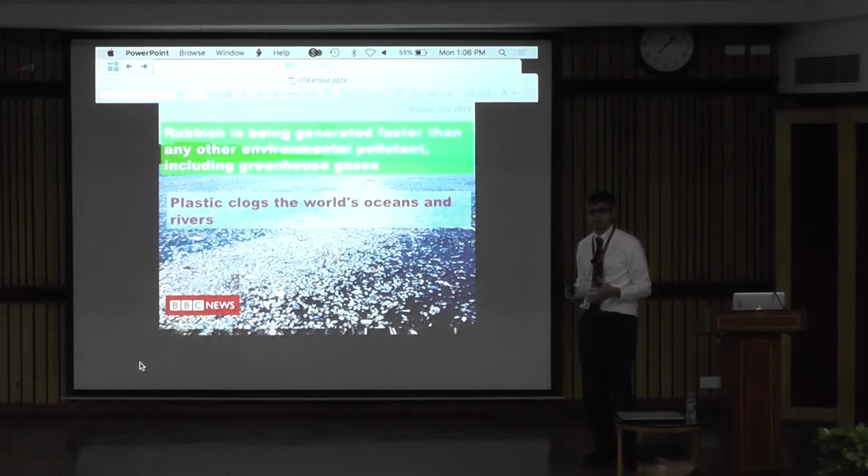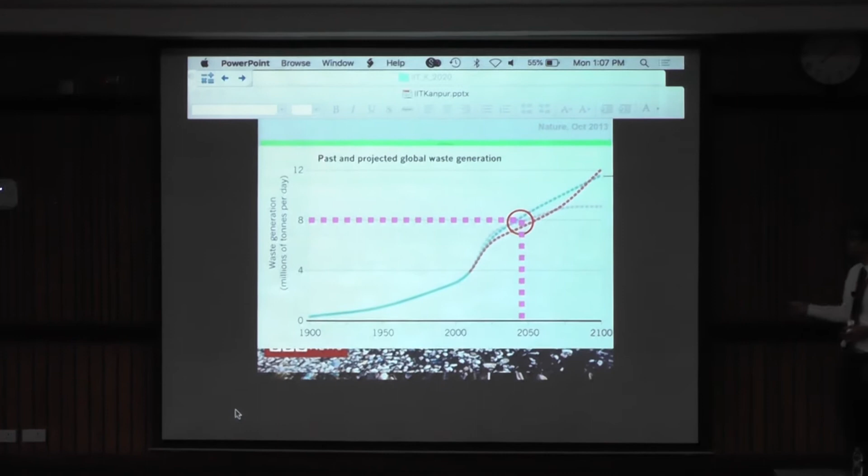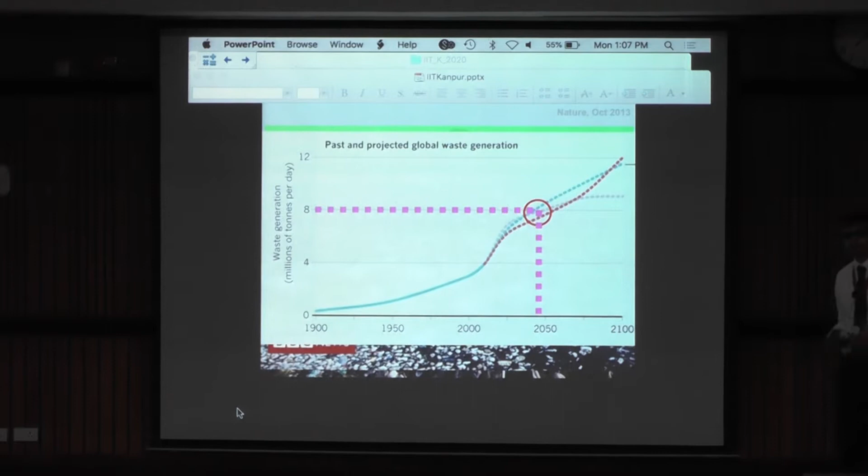You have plastic that's clogging the world's oceans and rivers. To give a sense of perspective, this shows on the y-axis the waste generated in millions of tons per day, and the x-axis is the years. It's projected that based on economic prosperity and population growth, by the year 2050 we will be generating about 8 million tons of waste per day.

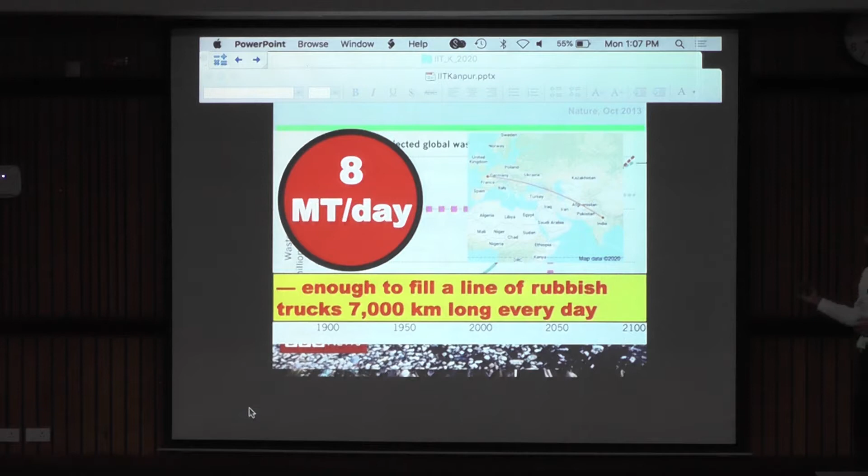That's essentially enough to fill a line of rubbish trucks about 7,000 kilometers long, which is half the diameter of Earth. Or from India, if you go all the way up from Kanpur, you can go all the way up to France and line up those trucks. And this is the waste generated per day, okay, so a very massive amount.

So why do we have this waste? What is the problem here? The problem is essentially the cost. In terms of solid waste management, it's one of the biggest costs, the second biggest cost in any municipality. The cost of handling solid waste is extremely high.

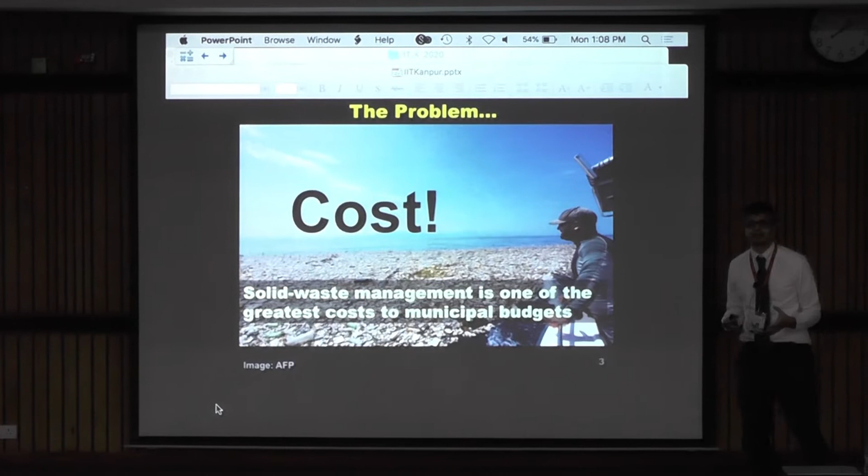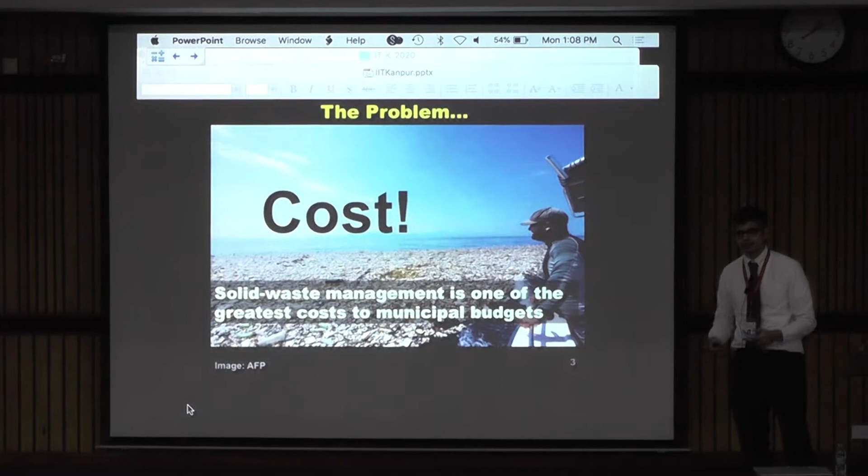So what happens is in most places where they cannot handle this waste, it then starts floating out into the oceans, into the rivers, into landfills, overflowing. And the current strategy, essentially, in managing most of this waste is you typically just burn it.

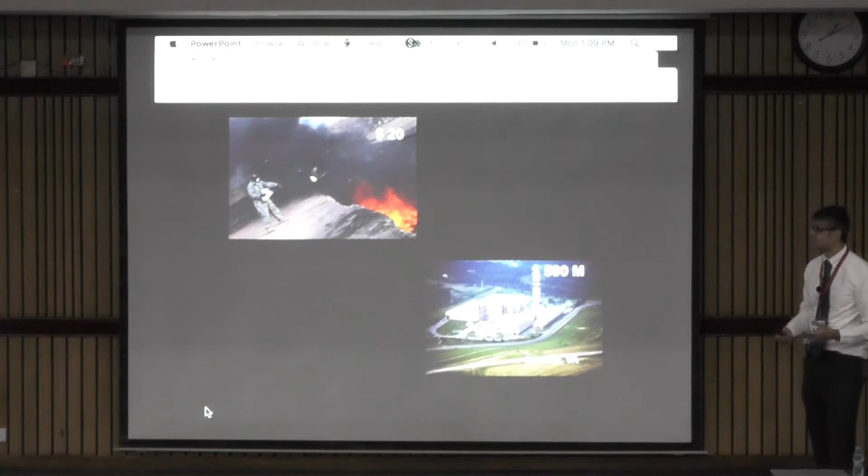You have other options: these smaller burn barrels that you can buy online, used to burn waste. This is a photograph from a village in Alaska called Ogashik, and what they do is every 2 days someone goes and burns the waste collected by the village in this burn barrel.

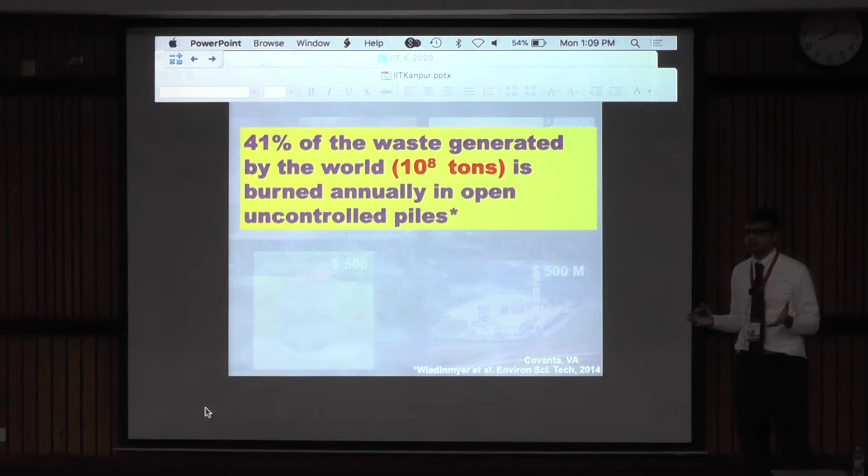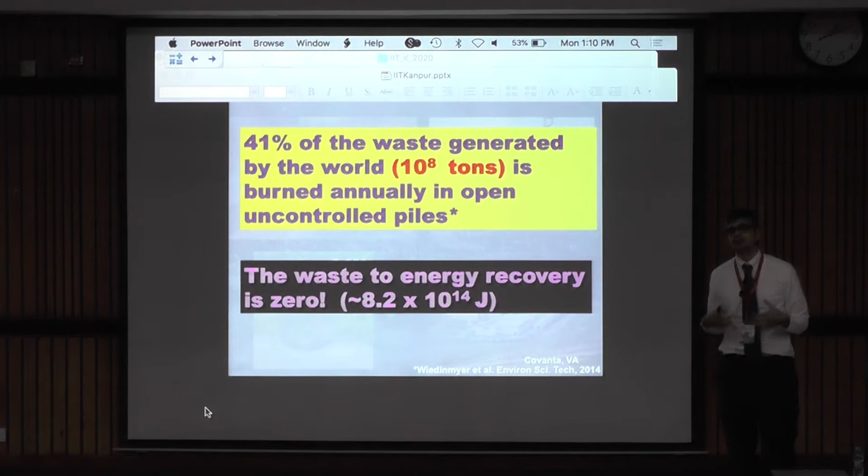There is a tendency as of now that around 41% of the waste generated is just burned, burned in the open in uncontrolled piles. There is no waste to energy recovery, and that's a significant amount of energy just going into the atmosphere. Why do they burn it? Because that is the only way of reducing the volume of waste.

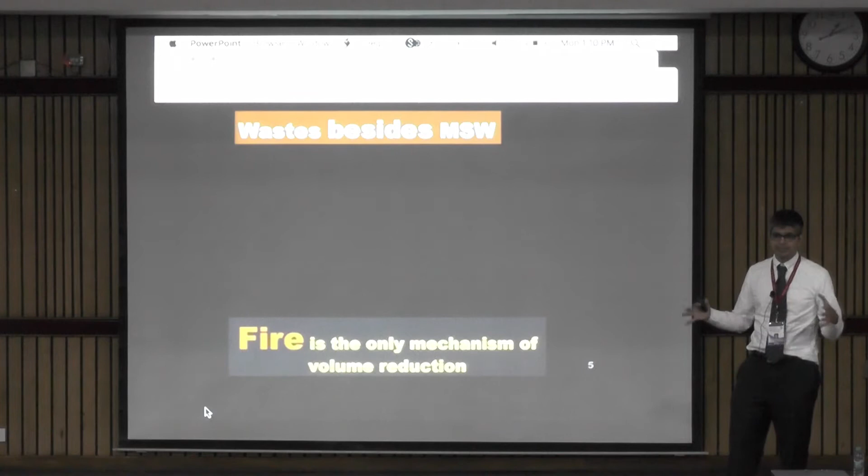Beside municipal solid waste, or MSW, you also use fire as a mechanism to clean up other kinds of waste. You have forest litter - that's a photograph of firefighters basically clearing up forest waste.

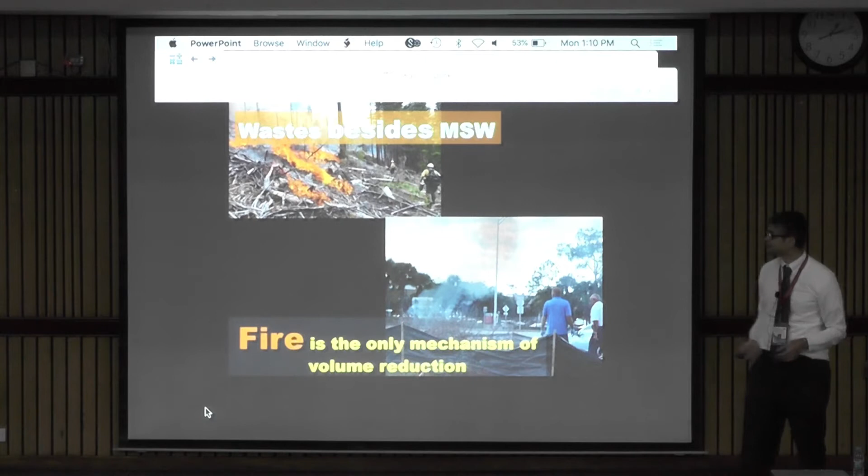This is a photograph I took in Florida, where on the highway there was waste accumulated after a storm, and they were basically clearing it up by just burning it. That's a photograph in Ghana, and that's medical waste right here that's being burned, again, for volume reduction.

This is an oil spill in Deepwater Horizon in 2010. The oil is being burned by these two boats, again cleaned up by fire, open burning.

dealing with China. This is a person basically, again, trying to burn waste in the open, a photo taken in China, talking about how China is dealing with a very big problem with waste, and the way they are curbing it is, again, just by burning it.

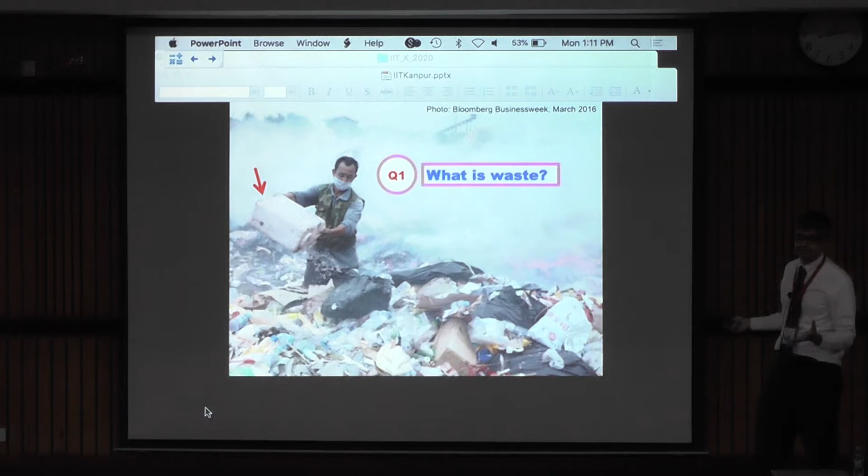So I'll start this talk with 3 questions as a precursor. We'll first figure out what is waste, why does it burn slowly, and the third is, why do we care? In my talk, I will not focus so much on emissions, but just with this basic idea that you have this waste, you are trying to burn it, but that burning is fundamentally very slow - and that is the first problem that we have to solve as engineers.

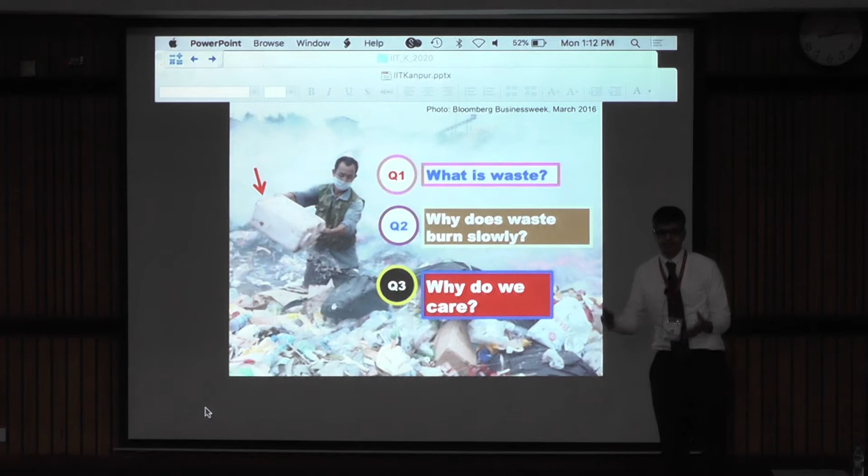And then you have other problems associated with emissions and repackaging that waste product and so forth. So what is waste? Waste is basically comprised of paper, yard waste, plastic, food waste, wood, a lot of things.

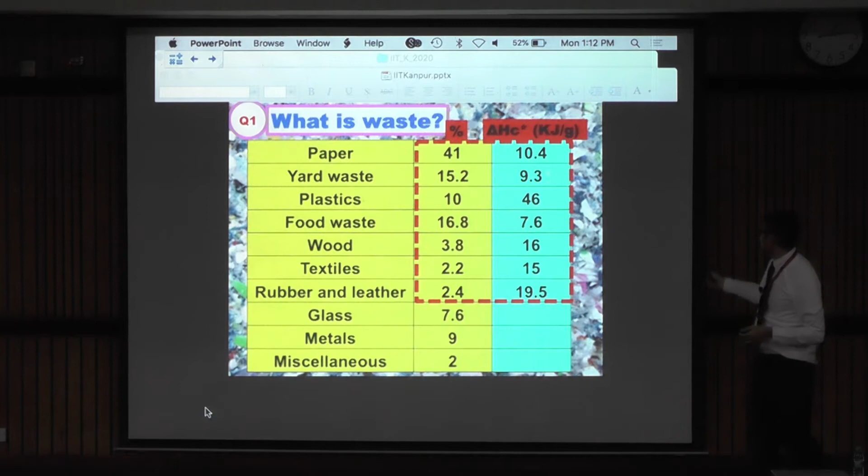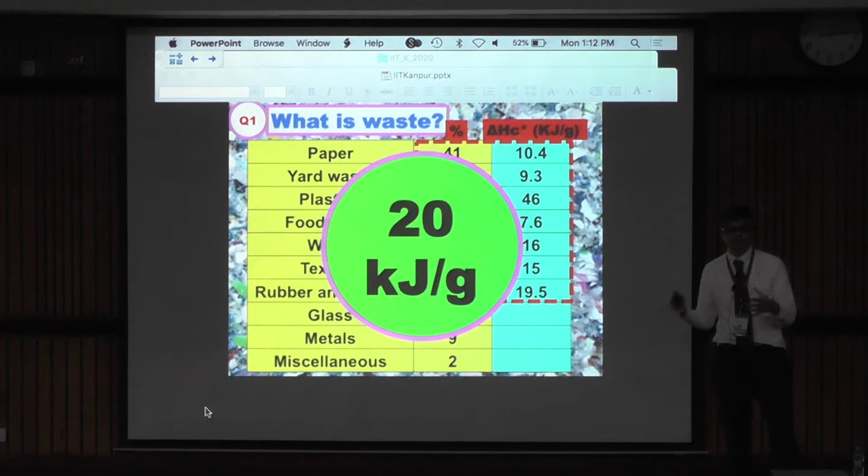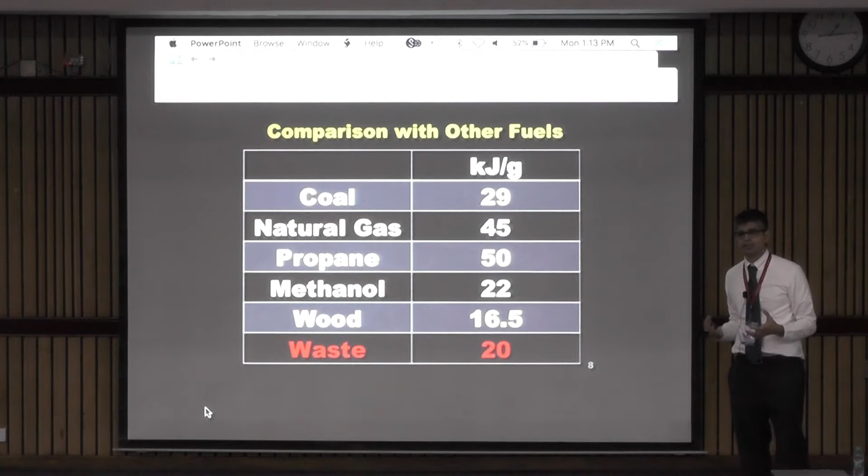What I have here is the heat of combustion of different kinds of waste. If you do a mass average, you come up with a number of about 20 kilojoules per gram. Typically, a waste stream fluctuates between 15 to 30 kilojoules per gram of energy. Compared with other fuels, you're not doing very bad. Coal is about 29, natural gas 45, propane 50. Waste is down here, about 20 kilojoules per gram. So it is a fairly good source as a fuel.

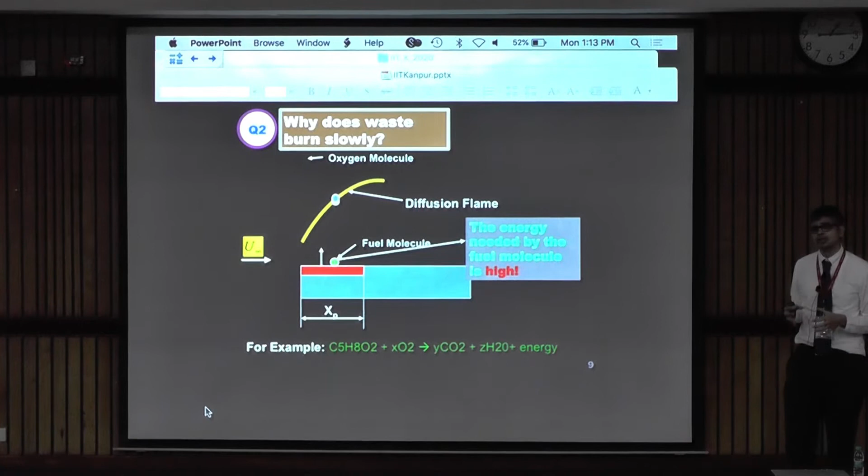But when you try to burn waste, especially in the open as a large pile, it burns slowly. Why? Because if you look at a classic diffusion flame problem, you have your fuel molecule going from the fuel surface and oxygen coming from the air, creating a diffusion flame. The energy needed by the fuel molecule is extremely high, and you have to overcome that energy barrier first to sustain the diffusion flame.

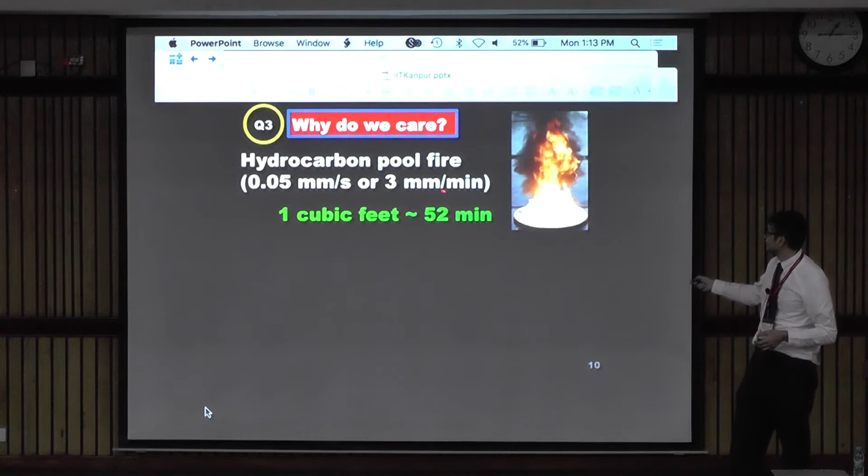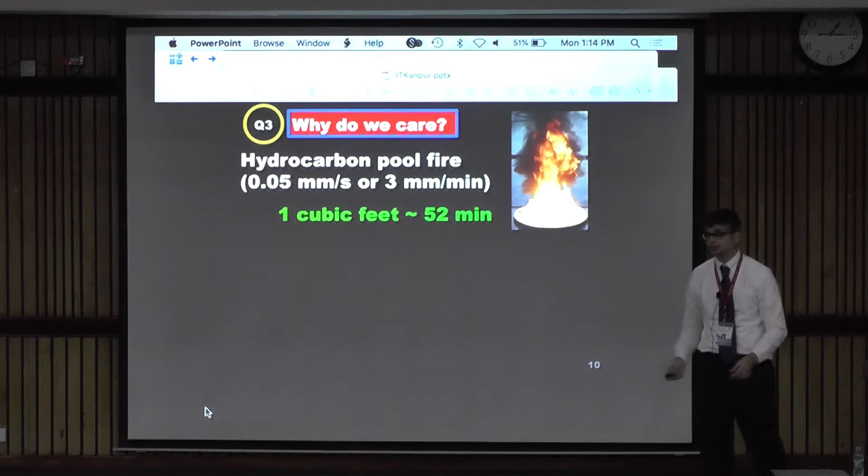So why is that important? If you convert that energy of a typical hydrocarbon pool fire burning outdoors, it regresses at about 3 millimeters per minute. If I have a 1 cubic foot cube of hydrocarbon waste and light it on fire, it takes about 52 minutes to burn. However, if I convert that into a premix problem, where I'm somehow able to premix the entire system, I can get rid of that 1 cubic foot of waste in 30 milliseconds. So it's a huge difference.

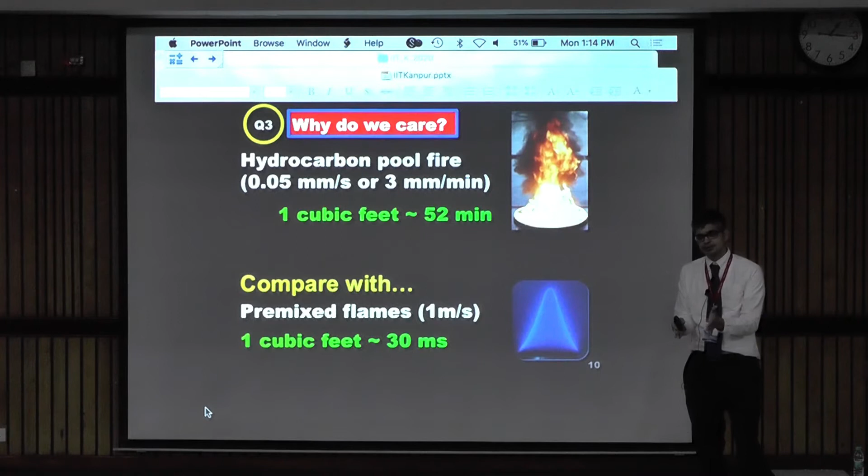So the question is, can we reduce this number? Can we bring this 52 minutes down to a smaller, more manageable number, so that a person in Alaska who's going to burn waste in a burn barrel, which typically takes 8 hours to get rid of the village waste, can burn it in, say, 1 hour?

Another example with environmental waste: this was the Deepwater Horizon oil spill. Around 207 million gallons of crude oil went into the ocean over 87 days, currently costing about $62 billion in cleanup. The US Coast Guard cleaned up waste by doing 411 burns in the ocean, but all they managed to clean up was around 10 million gallons, only about 5% of the total quantity of oil spilled.

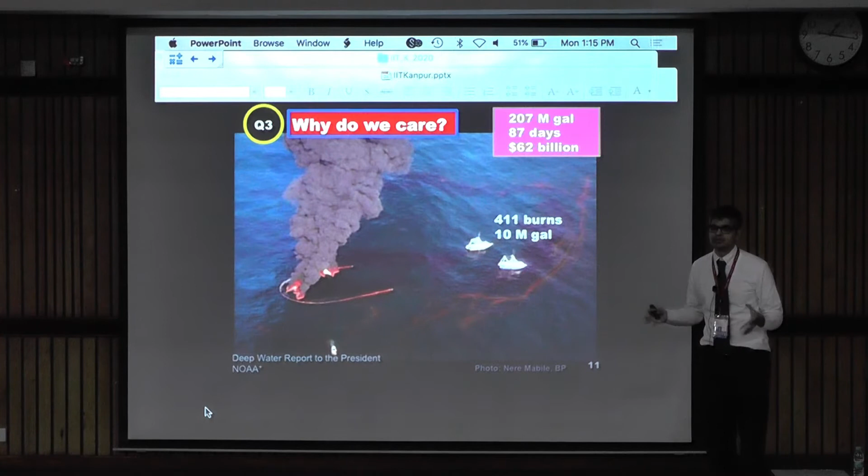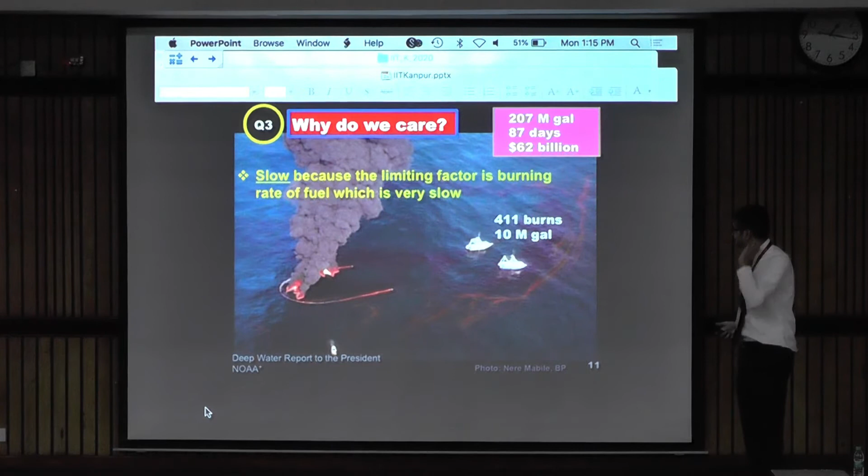Why was it so? Because it was burning so ridiculously slowly. At 3 millimeters per minute, with several boats, they didn't have enough time and manpower with that slow burning rate to clean up that quantity of fuel by burning it. Because it is slow, it creates a lot of smoke, it's polluting.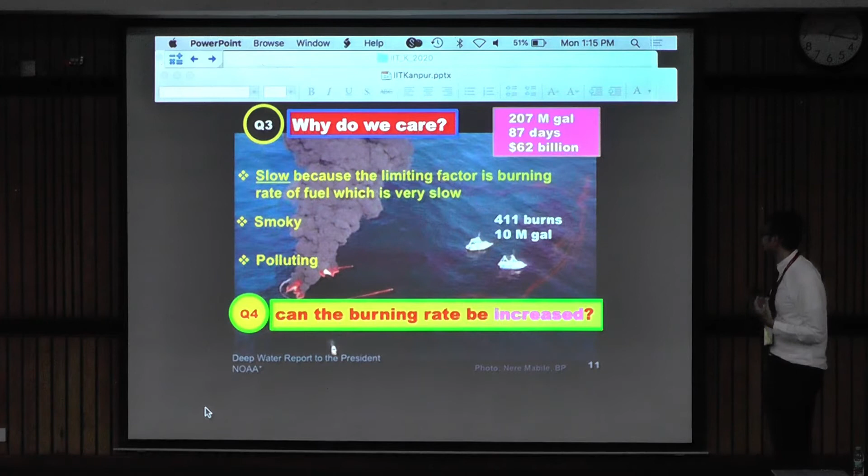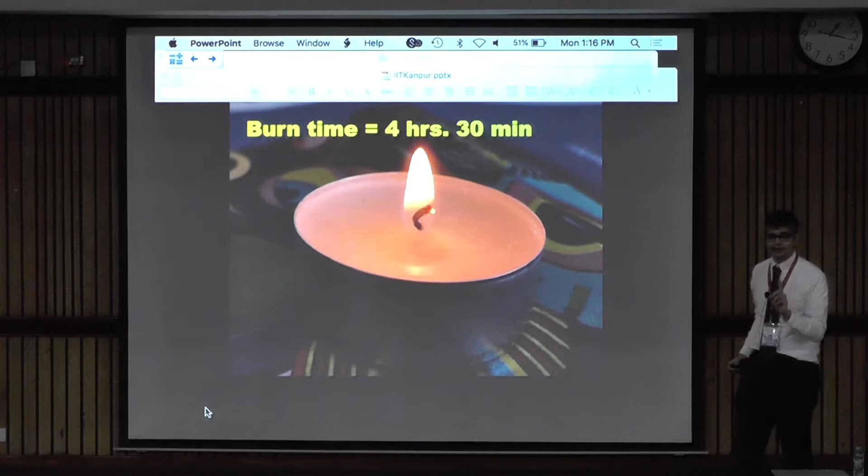And that brings me to the fourth question: can we increase the burning rate further? I'll use the example of a tea light candle, which is paraffin with a fairly high boiling point of 400 degrees C, very difficult to burn. You use a wick to sustain a flame on paraffin. If I just burn one candle, it takes about 4 hours 30 minutes for it to get consumed.

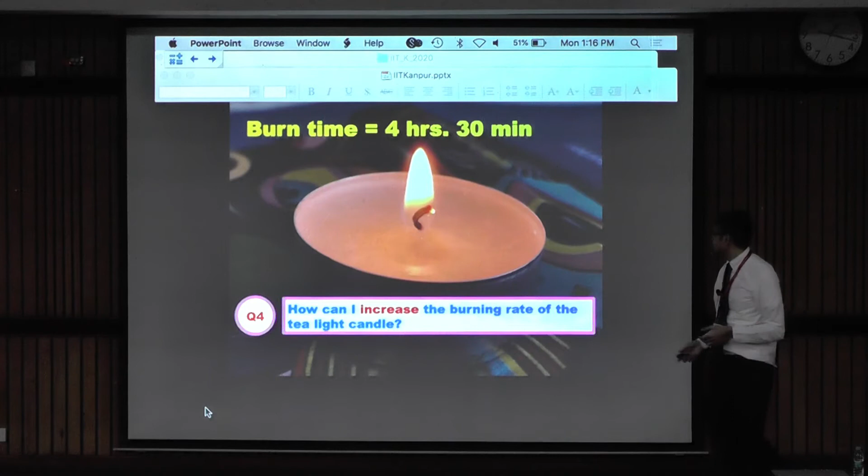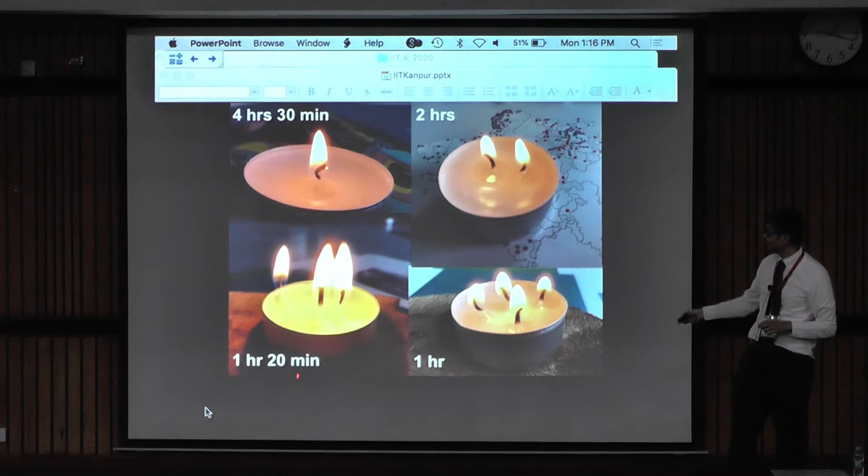So the question is, can I make that time faster? The easiest solution is you add more wicks. This is one wick; I added 2 wicks, the time reduced to 2 hours. I added 3 wicks, it became 1 hour 20 minutes. I added 4 wicks, it became 1 hour.

You can plot it: the x-axis is the time, the y-axis is the number of wicks, and you can see it goes up asymptotically. At some point, no matter how many more wicks you add, it doesn't burn faster. So the question is, can you increase the burning rate of this candle even more?

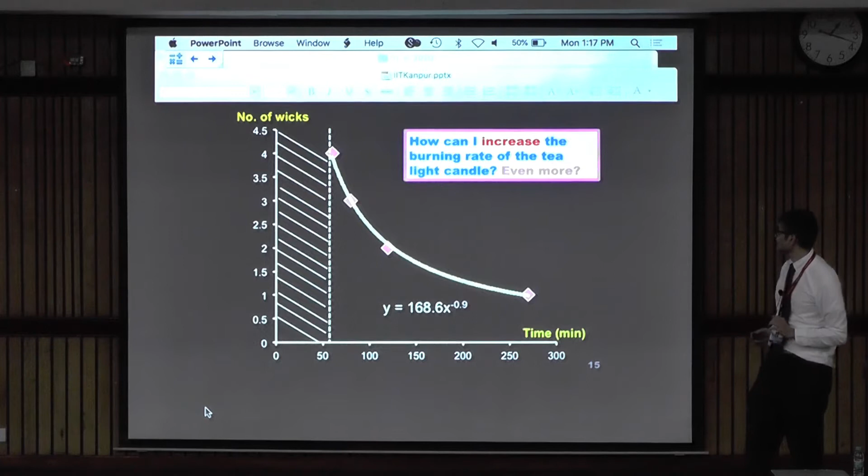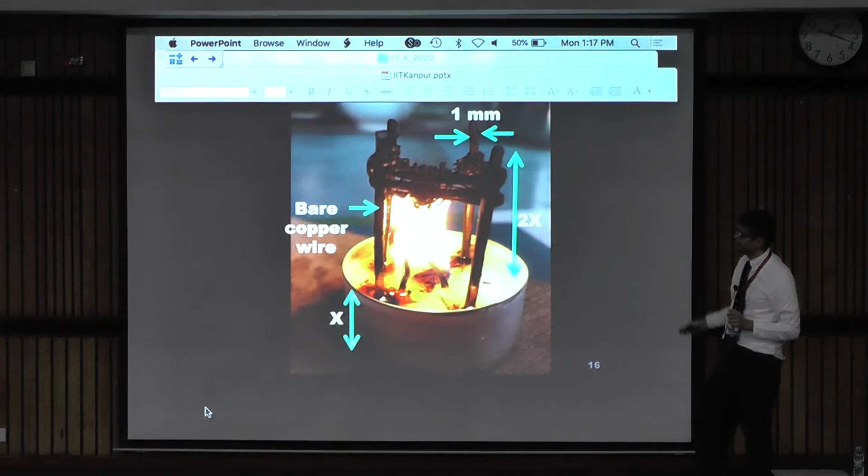So what I did next is I added 4 thin copper wires, 1 millimeter thick. If this is X, this was 2 times as high. And I burned it again. In this situation, in 20 minutes, you have this condition.

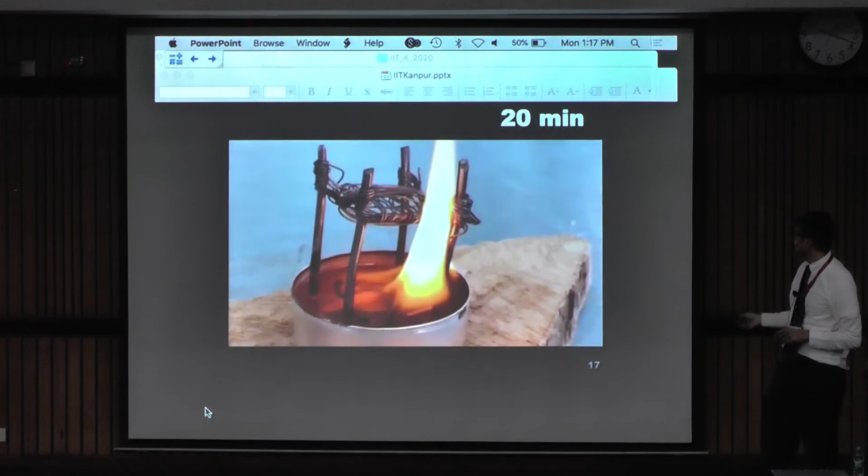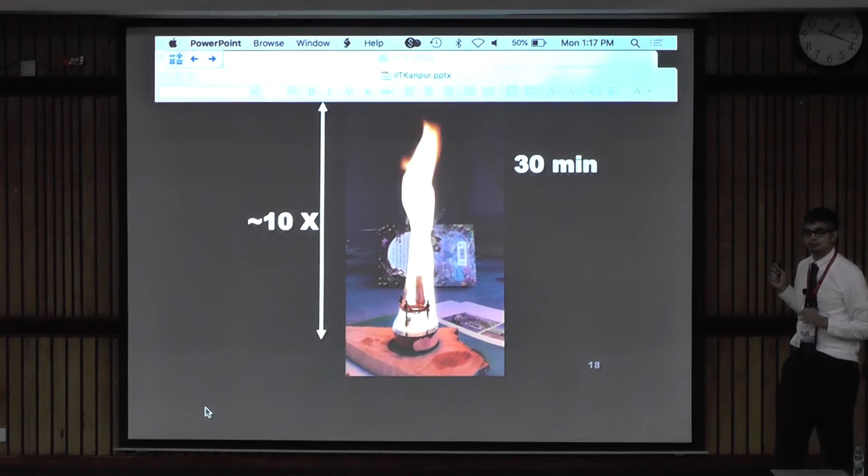So the wicks are all out, and you have a liquid pool here. Next, in 30 minutes, you have this. So that's the same tea light candle, and look at the way it is burning. Now, I don't think you will ever see a tea light candle that is going to burn with this intensity.

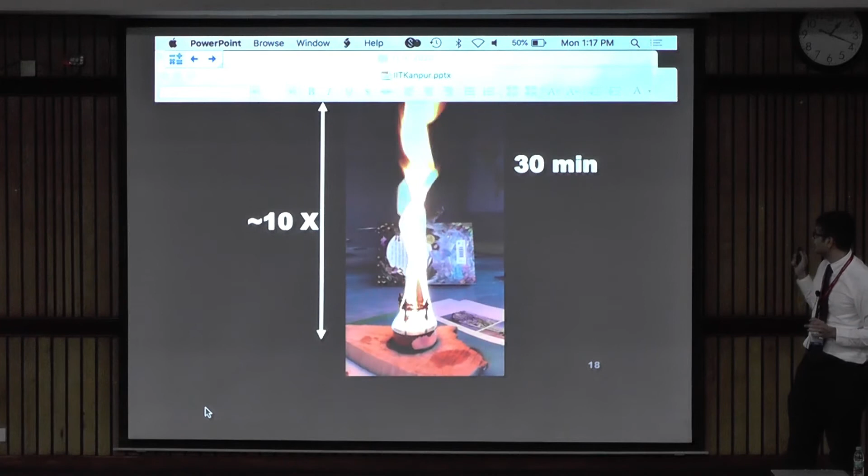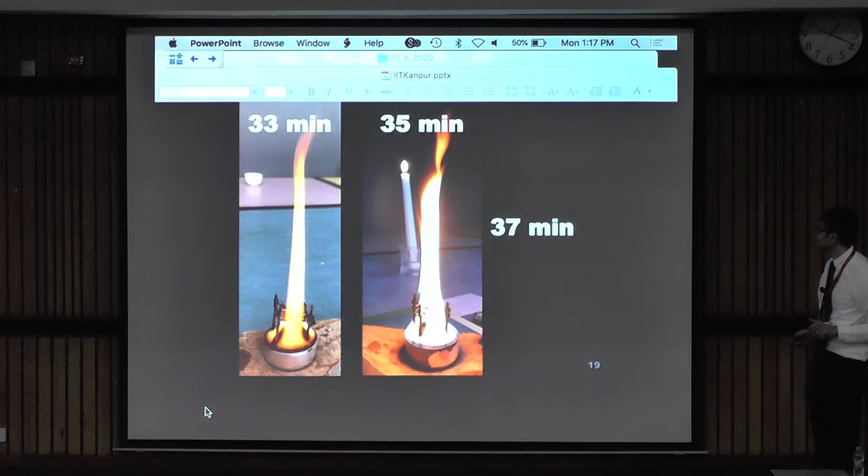And the flame height is 10 times higher, and once this happens, in 7 minutes, the entire tea light candle is gone. So suddenly you are moving into this region here, which was earlier not reachable, where you are able to consume this paraffin at a very quick, very fast rate.

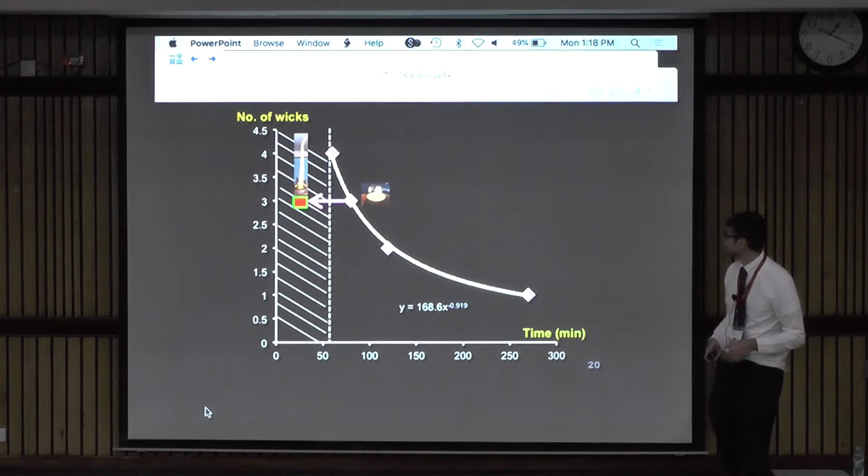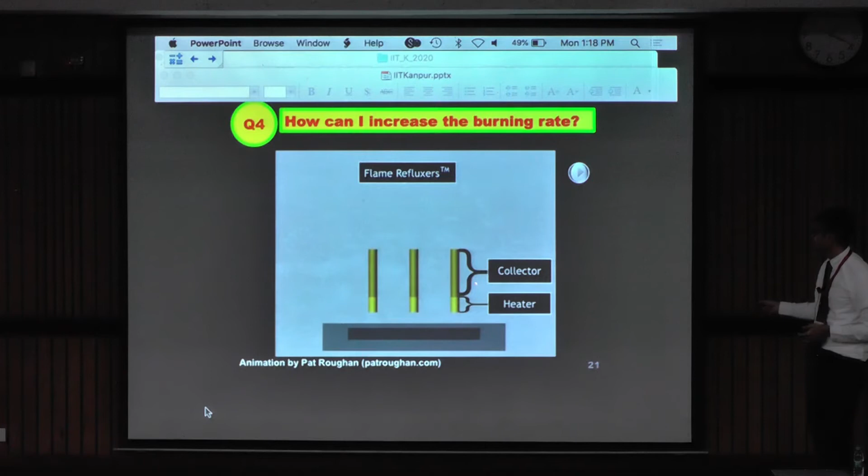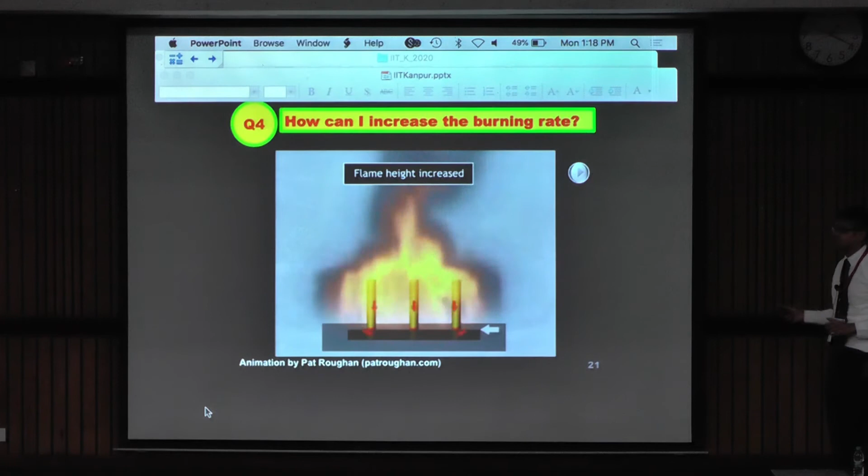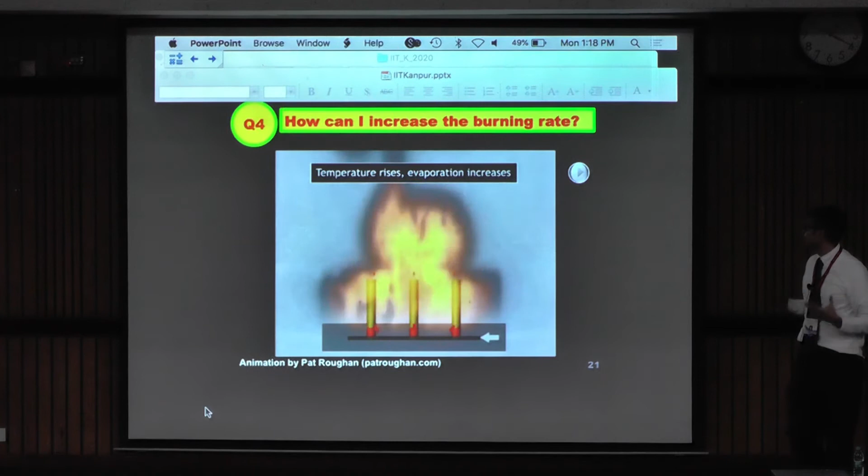So that's what we have been doing at WPI for quite some time, for the last 7 or 8 years. The basic idea is we use these copper rods, which we call Flame Refluxers. We insert them in a fuel, and they transmit the heat from the fire back into the fuel, creating a feedback mechanism which sustains faster, hotter combustion, and also reduces the quantity of smoke that's produced. Now the key in this process is essentially what is happening in the liquid phase.

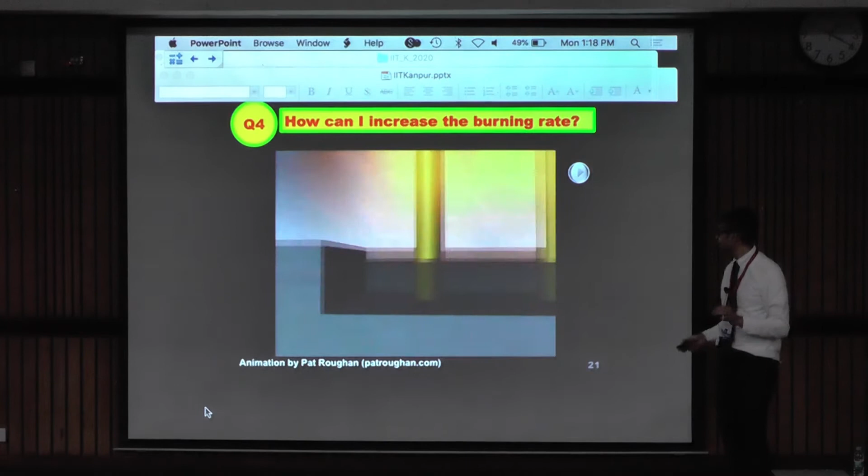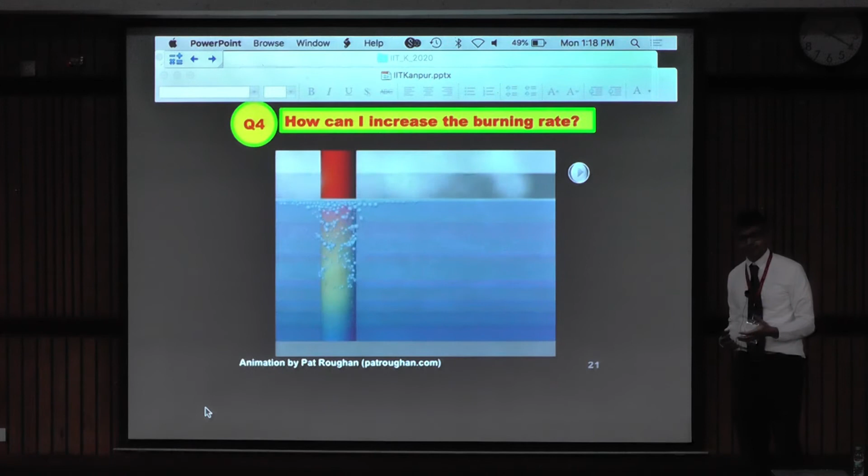So in the liquid phase, what you get is the production of these bubbles in the fuel. You have a significant 2-phase flow, the bubbles going up, bursting, and subcooled nucleate boiling that is created, which significantly enhances the heat and mass transfer of the burning process.

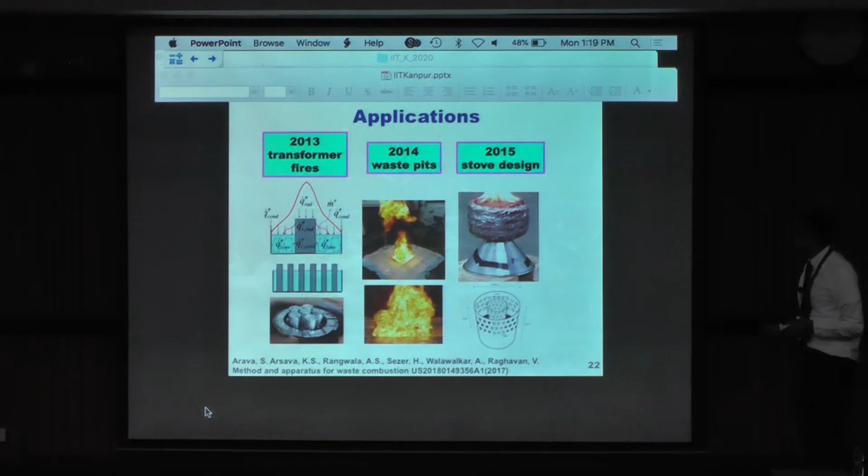We have been applying this core idea in several applications over the last many years. In 2013, we applied it in transformer fires, 2014 waste pits, 2015 we designed a stove with this idea. In 2015, we built this prototype burner to burn difficult to burn crude oil waste. We used it in situ burning, ISB is in situ burning, and currently we are working on organic waste, so human waste that is produced.

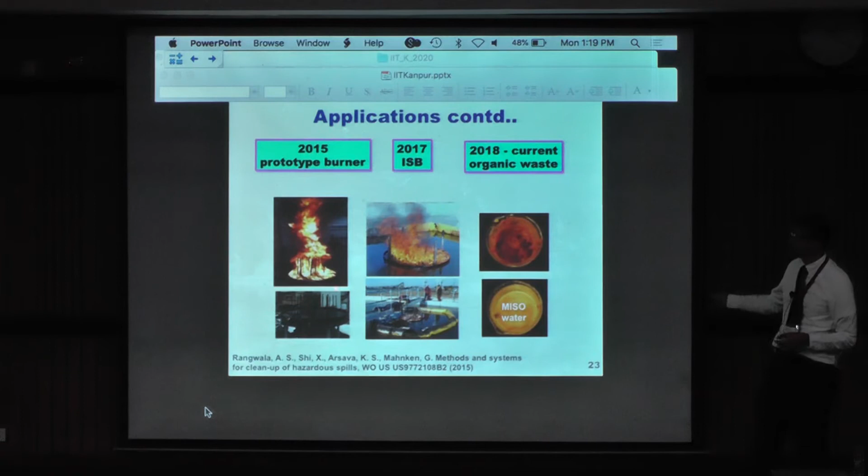So in the next few minutes, all I'll do is discuss this project and this project, the waste project and the burner project. So the waste oil burner is very simple.

It's just a pan where we fill it with a waste stream. The pan has essentially copper rods that we insert in them. The copper rods are about 1 centimeter thick. And we typically achieve burning enhancement by a factor of 10.

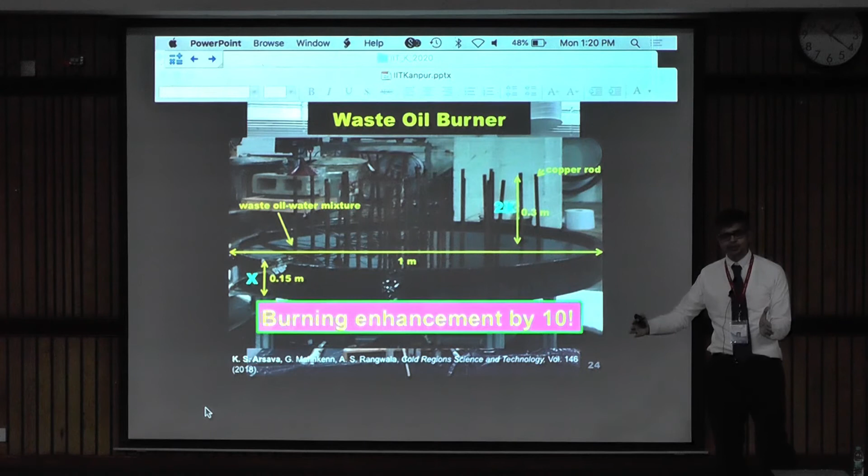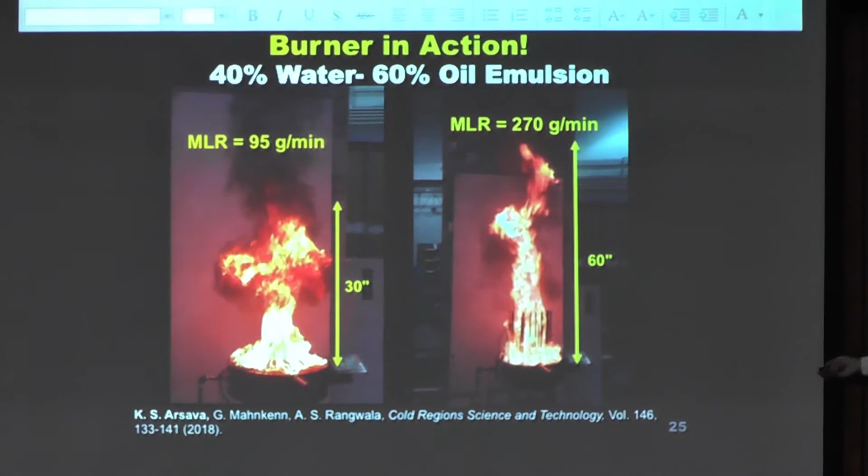So going back to that 1 cubic feet problem of hydrocarbon waste, which took 52 minutes to burn, by using this method, you can reduce the time from 52 minutes to 5 minutes. So that's 40% water, 60% oil burning right here. And you can see that we have a significant improvement in the mass burning rate, about 3 times.

The easy thing is you add more rods into your system and you increase the burning rate even more. So this is an extremely difficult fuel to burn, 60% salt water, 40% crude oil. And in the baseline, you can see it's not ignitable. You can't burn it, you need a starter to make it burn. And then if you add more rods, you can achieve significantly high mass burning rates.

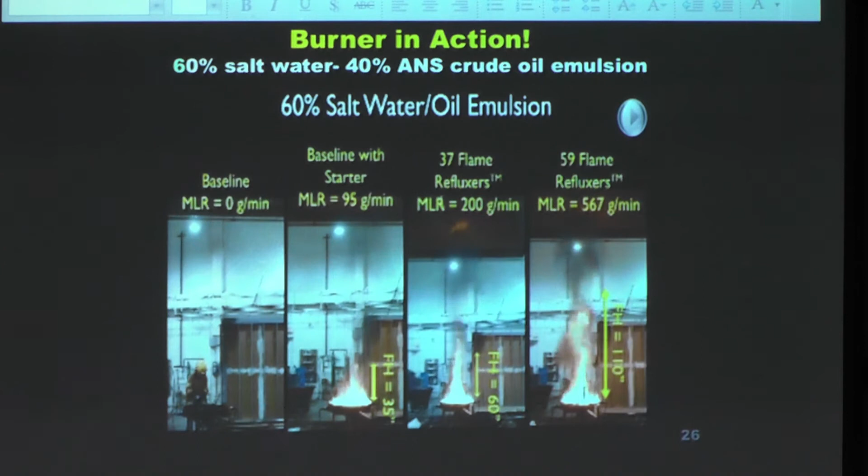So in terms of controlling parameters, I told you it was also about multi-phase flows. There is a significant, very fascinating heat and mass transfer problem coupled with this subcooled nucleate boiling. What you have is the heat flux from the flame, this internal cooling and also heating, and it's all moving into coming up with some kind of an expression for the mass burning rate.

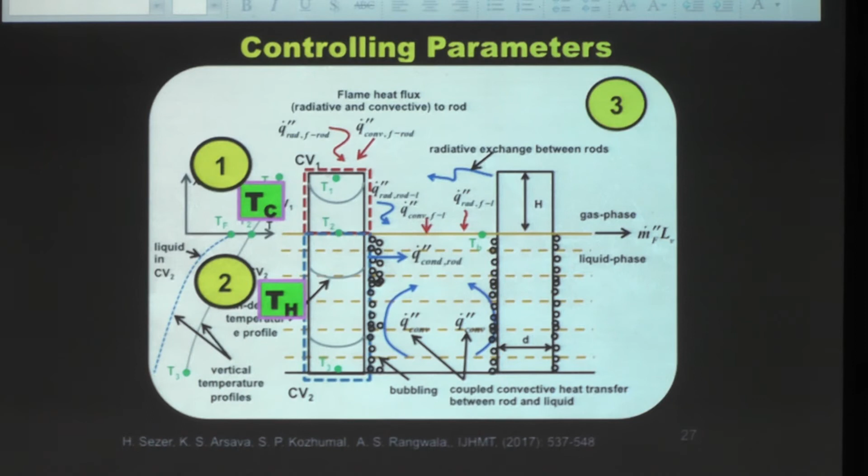What we have done is we have come up with a simplified model where we rely on two temperatures: the temperature of the part that's in the flame and the temperature of the component that's in the liquid. And the third is the nucleate boiling curve, the subcooled nucleate boiling curve for the liquid.

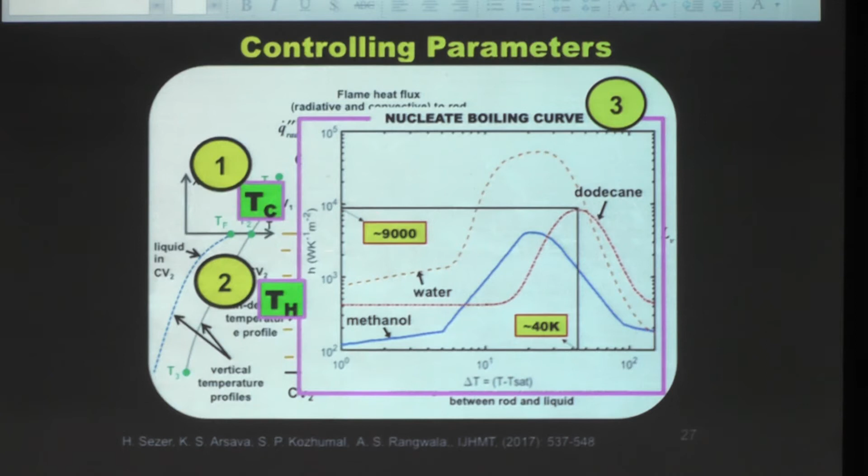This is just a representative example, for dodecane. The nucleate boiling curve is highly nonlinear. It essentially peaks at around 40 Kelvin, and the peak heat transfer coefficient is about 9,000 - just ballpark numbers. The reason I'm putting them here is because it gives you a sense of the theoretical upper limit. Your standard mass burning rate in a hydrocarbon pool fire is about 3 millimeters per minute, which is about 5 grams per meter square per second.

But if you now include this aspect of nucleate boiling at an upper limit, let's say you're at the critical heat flux, where you're putting the right temperature gradient and correspondingly extracting the maximum heat transfer coefficient, you will get a mass burning rate of about 1,000 grams per meter per second, which is 200 times higher. So the potential is tremendous in terms of optimizing this basic idea and consuming fuel faster.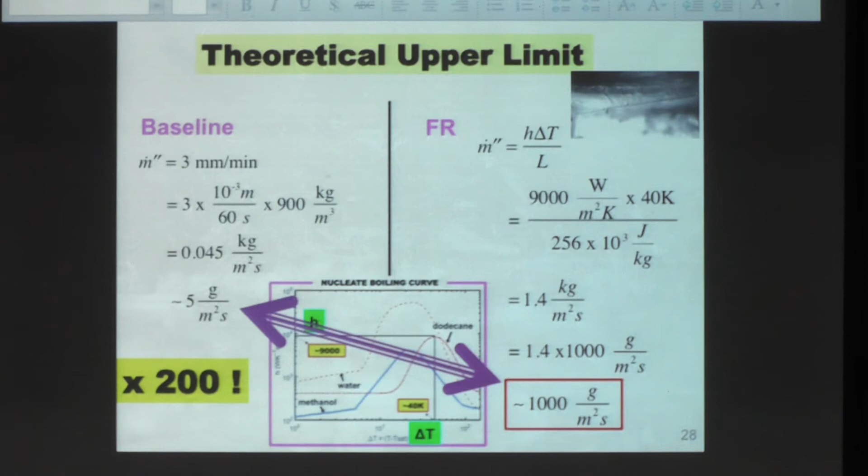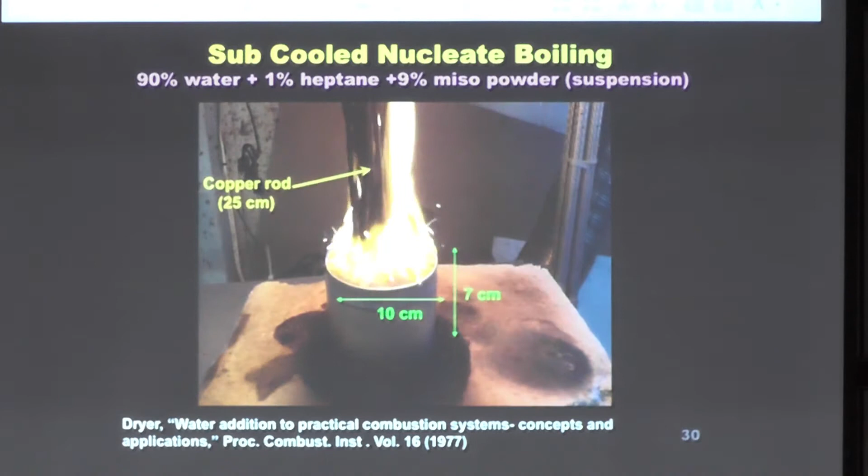So we also tried it in burning organic waste. This is essentially miso powder, which is an organic soy. You can see this is 90% water, 1% heptane, 9% miso powder, a suspension, and it's burning. What I want to point out here is these particles that you can see coming out of the flame - that's essentially particles of miso shooting out of the flame.

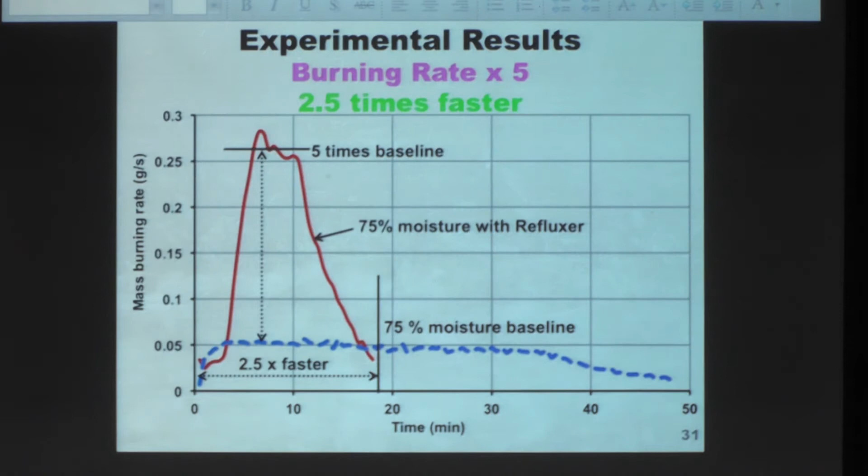And again, the burning rate is about 5 times faster, 5 times more, and it also burns faster. What is very fascinating is that this is 50% water, 75% water, and 90% water.

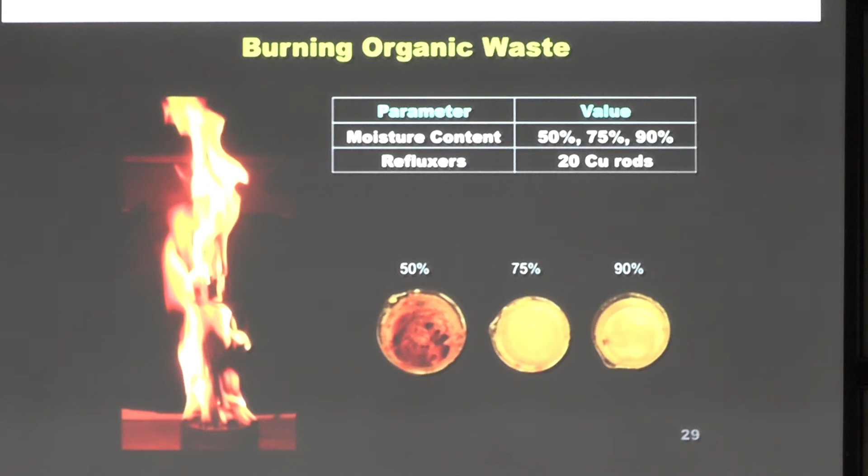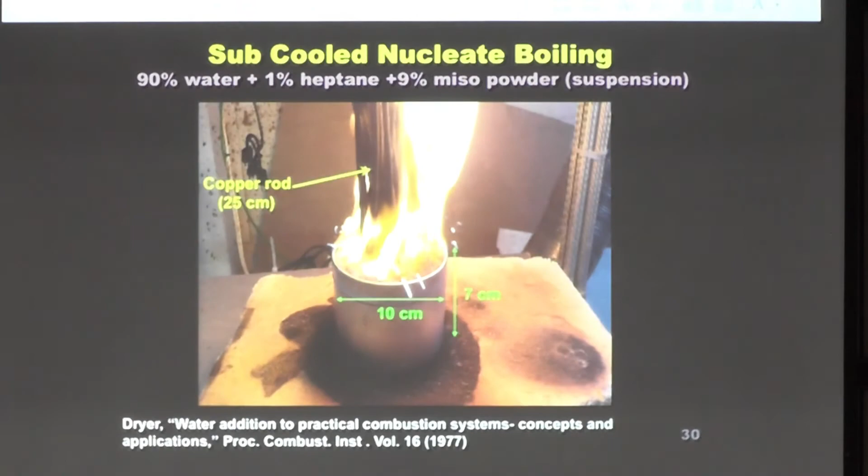What we see is that there is a threshold at about 90% water where it burns the best. So as you add more water content to this fuel, it burns better. The reason is because of the production of bubbles on the copper rods and the corresponding sparks that you see flying out. That's something we are investigating further right now.

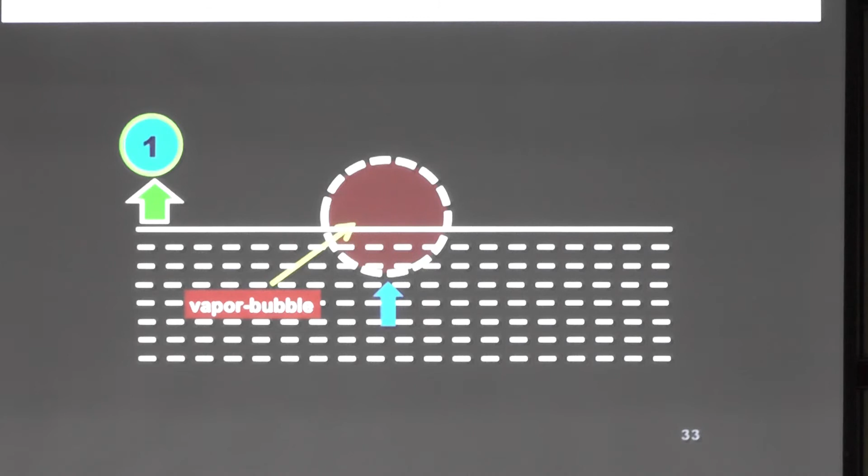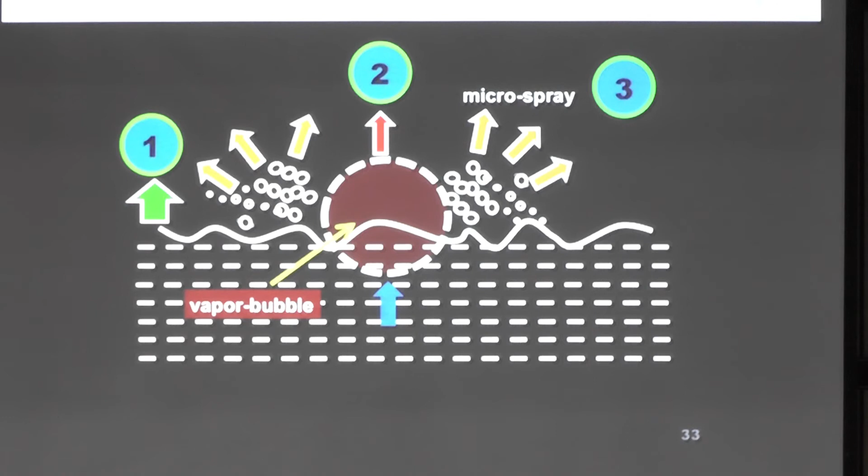Essentially, you have a vapor bubble that's produced, and when that vapor bubble bursts, it creates a micro spray. That micro spray essentially adds more fuel to the flame. That is why when you have more water in that miso soup, you get a higher heat of combustion, or better burning.

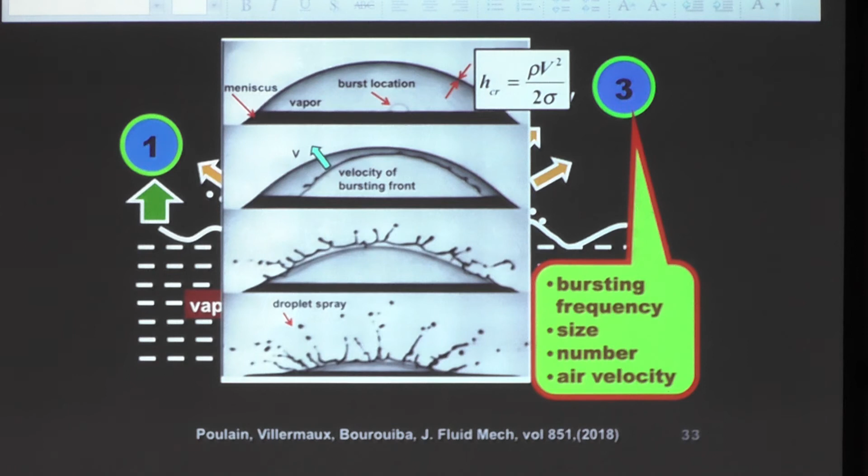So the bursting frequency, the size, and the number of bubbles produced are all important parameters that create this droplet spray, because of the bubbles being produced. And the bubbles are produced because of the copper rods submerged in the liquid. So that's basically all I have to conclude.

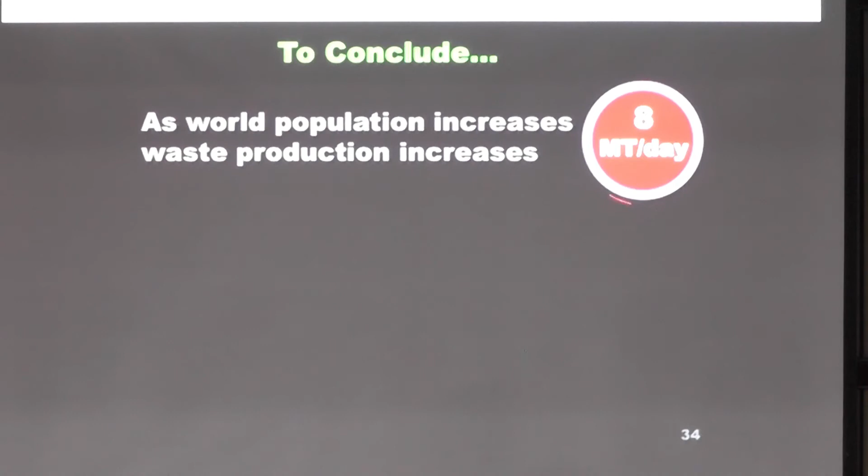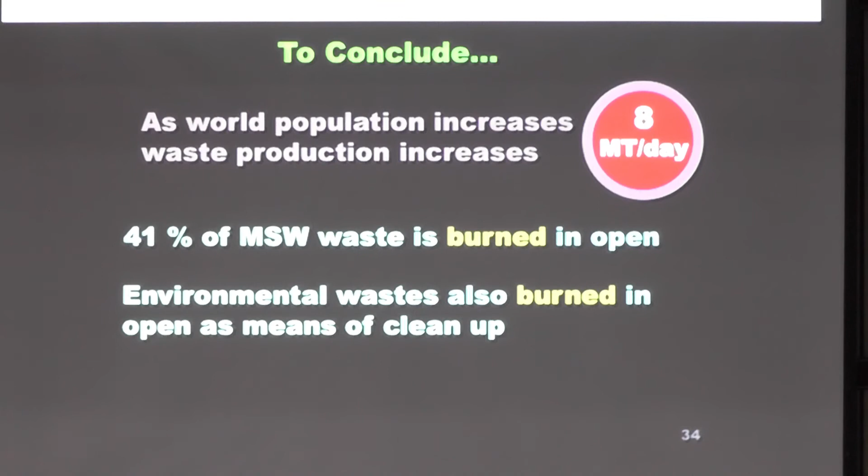As the world population increases, waste production will increase. We're going to reach about 8 million tons per day very soon. 41% of that is currently burned in the open, and in addition, any kind of environmental waste is also typically just burned in the open. That creates a significant opportunity for us to burn waste in a faster and cleaner way, and also creates an opportunity to use waste as a fuel.